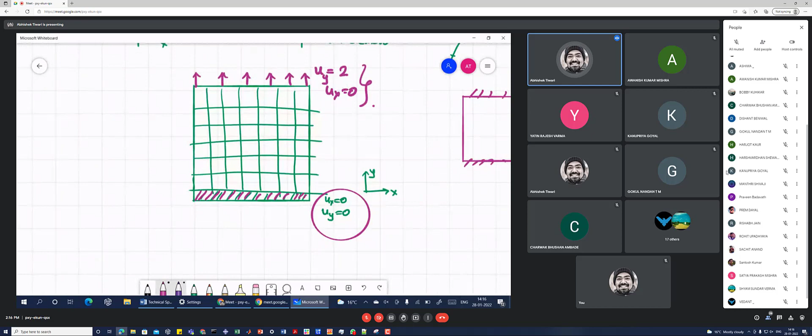And what is the degree of freedom in our continuum mechanics problem? This is called continuum mechanics because the material is in continuum, right? So there is no discontinuity. So we cannot incorporate any hole damage. I mean, hole we can, but we cannot incorporate physical metallurgical things like inclusions and carbides and damage as it is, literally damage like voids, we cannot incorporate. We cannot incorporate dislocations and those kinds of things because those are discontinuities, right?

So we imagine the material to be continuous. It can be heterogeneous, but it is continuous. So there is no discontinuity between material, there is no gap. Is this understood? As long as I define an object, it can be a complicated object, it can be a gear, it can be anything, but wherever the material is, that material is continuous.

So we are in that continuum zone, and what degree of freedom are we solving here? The degree of freedom is the parameter which is being discretized and solved in each element, and in this case that is displacement. So displacement is the degree of freedom. In a two-dimensional problem, on this element you have 4 nodes. The 4 corners are 4 nodes: node number 1, node number 2, node number 3, node number 4.

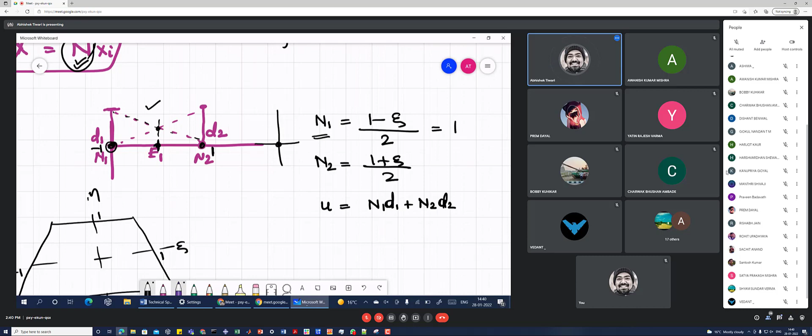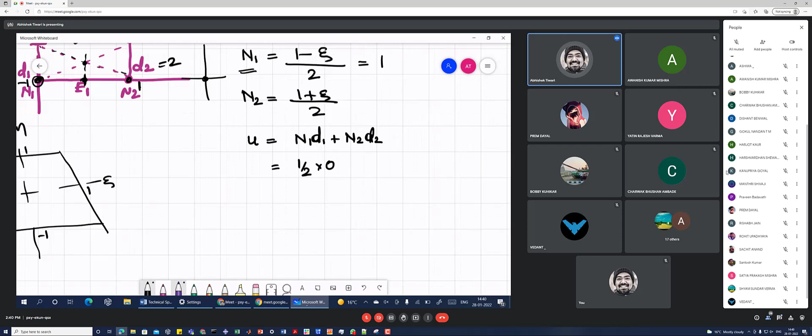Right? And this defines the relationship between the nodal values and the variable of the displacement, the varying, continuous value of displacement. Okay, so if I have to calculate u at the middle point, then u is going to be N1 u1 plus N2 u2, or d1 d2, because u2 you might confuse with uy, so d1 d2, right? So d1 in this case, because it is fixed to the wall, is going to be 0, and d2, let us say, is 2. And node number 1's value at that midpoint is half, so half into d1 is 0, plus half into d2 of 2, so the displacement at the middle point is going to be 1 millimeter.

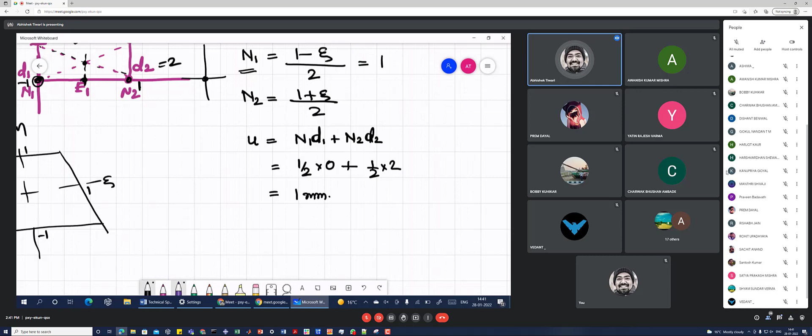Okay, so this is what defines the relationship between the nodal value of displacement and the varying value of displacement. Okay, so if this is clear, then we can proceed with this information, that we can define the displacement with this equation.

Okay, and now from this we have to find out what is the value of strain in each element, and we are doing it for each element. We are not doing it for the whole thing right now. We are dealing with one element at a time.

Okay, so if you remember the strain matrix, we can define that as del u by del x, which is epsilon xx, then del v by del y, which is epsilon yy, and then we have del u by del y plus del v by del x, which is epsilon xy. We have only 3 terms because I am considering a 2-dimensional problem, otherwise I will have a 3 cross 3 matrix. Okay, so this is how I am going to calculate strain analytically.

And in order to do that, you will have to partially derivate this displacement. You see that, right? So let us say if you have to find out epsilon xx, then in order to find out del u by del x, you will have to partially derivate N dot d, right? Yes, sir. Okay, so now you have to do the partial derivation of the shape function, right? And this we have written here in this way.

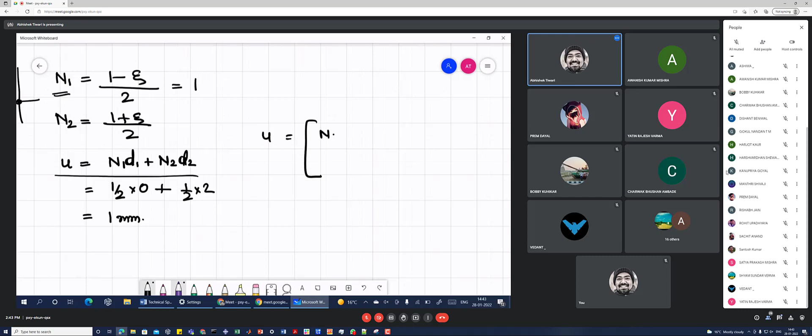In the quadrilateral element, you have 4 values of displacement in x direction and 4 values of displacement in y direction, right? So how will it look? It will look something like this. N1 N1 N2 N2 N3 N3, because you will have 4 points in a quadrilateral. So you will have something like this with zeros, and then you will have a column vector which will be the local value of displacement. So here I will write u1 v1 u2 v2 u3 v3 u4 v4.

And how did you write that first matrix? I didn't understand. Which matrix? This one. So this N, I'm going to tell you how. Because in each quadrilateral you have u1 v1, u2 v2, u3 v3, u4 v4, right? This is okay? Yes, sir. Okay, so that becomes this column vector.

And because we have defined this, this is how you are going to get that formula. So first, what will be the value of multiplication of these two? How many columns? 1 2 3 4 5 6 7 8. So we write rows versus columns: 2 cross 8, 8 cross 1. So the result is going to be 2 cross 1, right? So what will you get? You will actually get ux and uy.

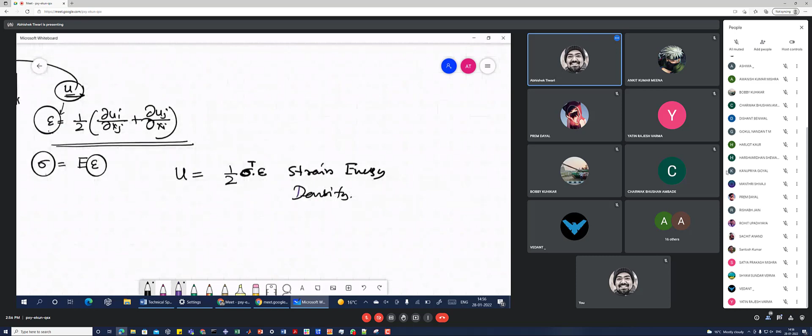So the energy which is being stored or consumed is going to be only because of the deformation, which is strain energy, and because it is per unit volume, you call it strain energy density. Why density? Because it is per unit volume, that's it. Okay, and now you have an energy term, so you make it minimum. Once the energy is minimum, you can say that this is the stage of deformation which is stable, because this is the lowest energy state. Is this making sense? Is it as good as a thermodynamics problem?

Yes, sir. You calculate the energy of the system, but you will not only have strain energy, you will have a lot of energies. Sometimes thermal energy, sometimes some other energy form, and all those energies in totality will have to be minimized. And how will you minimize that? By taking the derivative and putting it equal to 0, right? So that is called the minimum energy criteria, or minimum potential energy criteria. Okay, so this is how the finite element method really solves the problem. If we go into further detail, there are a lot of things to cover.

As I said, at some point we will have to convert from local to global, global to local, back and forth, and here we will have to deal with a lot of things like elasticity, which is isotropic, if not, then anisotropic, or plasticity, creep, viscoelasticity, and damage. All those things will be incorporated here in the material's stiffness. So there we will have to do a lot of things, and then in order to calculate the energy in one element, you have to do the integration of this.

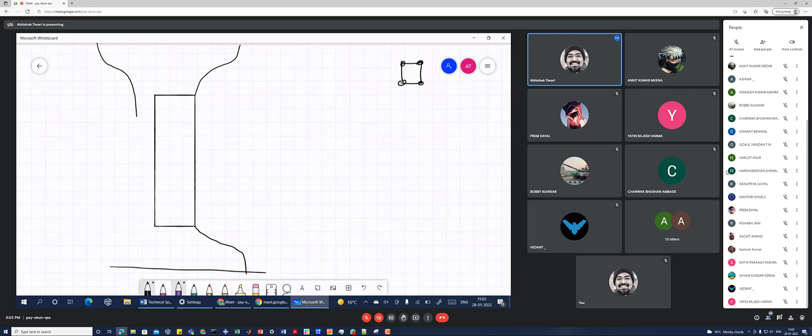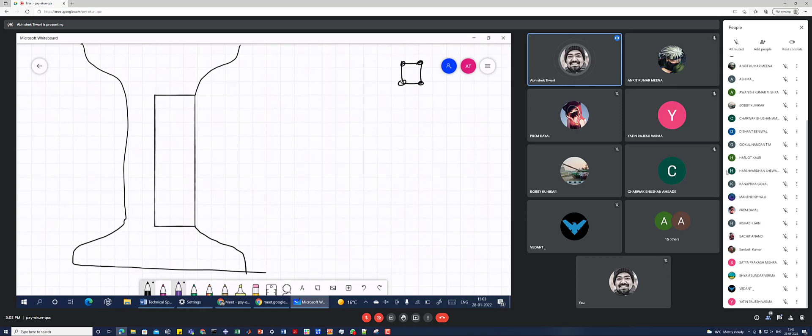Because Yatin was saying the screen was not visible and he was also not here, I am repeating it, but I am not going to do this again and again. So we took this, which is a tensile sample. Now I cannot undo it. Okay, so this is the whole tensile sample, and we are not interested in modeling these areas. We are only interested in modeling the gauge length, which is the parallel length specimen part.

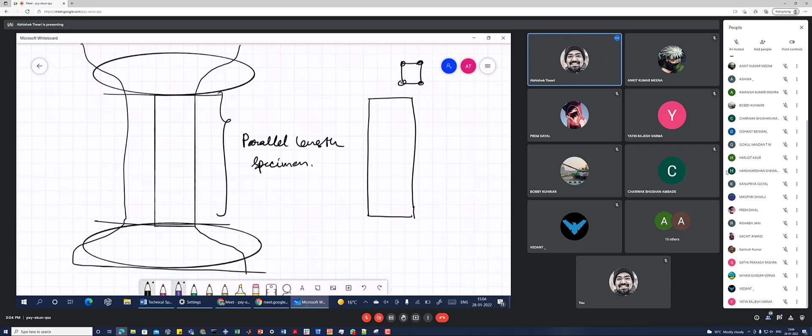So that is what we are modeling, the gauge length part, which is a cylinder, and that cylinder is axisymmetric. So we only take one axisymmetric film out, and then we model that, and now we will come back to the other screen. I am stopping here unless somebody has something to ask.

Okay, so let me stop it here and share it there. Do you see the other screen? Yes, sir. What did it save? Okay, sp2.save. Okay, fine.

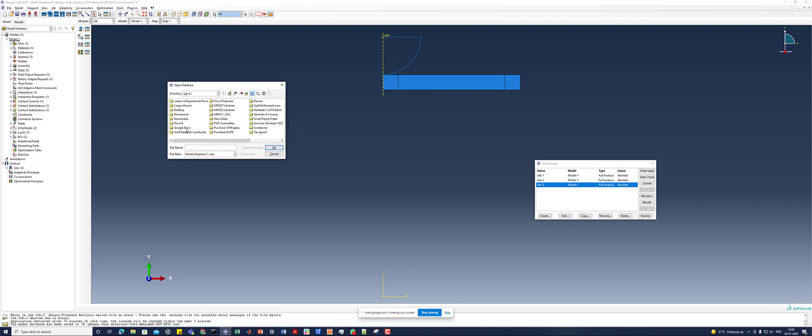So this is the object which we made, and I will make it today again for the sake of revisiting how we did it and what we did, and then we will finish this. For today's work there will be no lab report, so you don't have to submit one next week. But I hope you understand this well and use this time to understand this.

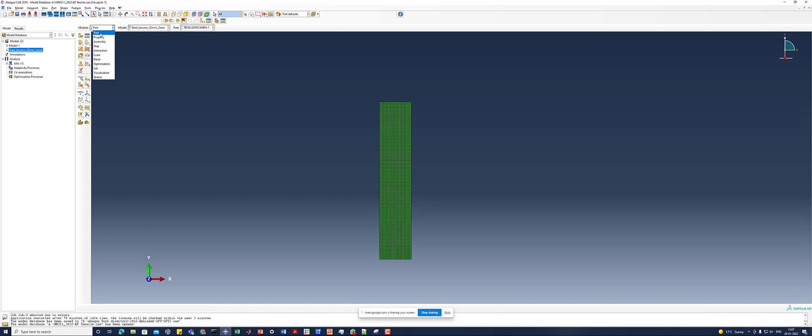Yes, sir. Okay, so I will do again today what we did previously. The plastic part and how we generate the data for yielding, that I will not do. That we have done. You can see the lecture of the previous semester or the previous lecture and get it from there. So let me open this again, and I will tell you a little bit about the software. This, of course, you have to install.

Okay, and I'll have to change the resolution, which is always an issue. So 17, this is very small. So let us try 1920 by 1080. Okay, so this is the software which you install, and then you have a lot of modules here which we will go through one by one, and we will make the model again.

Before that, the first thing, and I am telling you something new today, so those who are here, please be ready to absorb this, and those who are not here, I really feel sorry about that.

Okay, what else? Avnish, can you take a second round of attendance, quick? Yes, sir. Adarsh. Yes, sir. Ankit. Yes, sir. Asima. Yes, sir. Bobby. Present, sir. Charwak. Yes, sir. Gokul. Yes, sir. Arjot. Yes, sir. Aswani. Yes, sir. Kanupriya. Shivaji. Yes, sir. Prem. Yes, sir. Praveen. Rishabh. Yes, sir. Satyaprakash. Present, sir. Shyam Sundar. Yes, sir. Vedant. Yes, sir. Yatin. Present, sir. Sachit Anand. Sachit Anand.

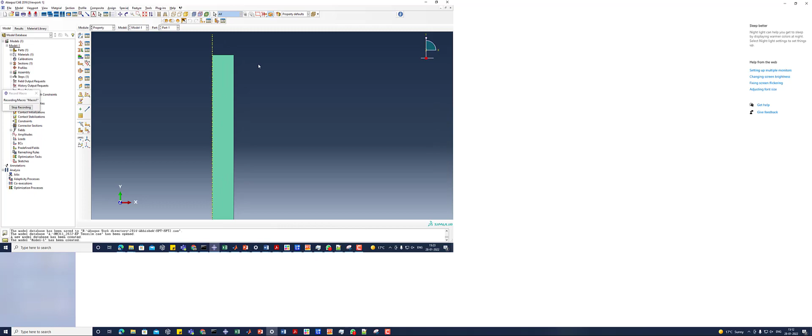Now you go to the third one from the top, click there, section assignment manager, create, you select the object, you see the message here, select the regions to be assigned a section. You select this object, click done, and then it asks which section you want to assign, because you have made only one. So in the pop-up menu you will see only one. So it is already selected, it is solid, homogeneous, the material is steel, and then we click OK. It should have become green. I don't know why it is not green so far. Yeah, now it is green. So some graphics issue. So material has been assigned to this.

Now we go to assembly. Assembly, I told you what it is. So if you are making an engine, or if you are modeling a railway track or a railway wheel, then you have to make the railway wheel, then the shaft, then the rail, and then in the assembly you have to put all those things together, place them correctly and join them, right? So that is what assembly means, assembling different items. We only have one item, so we don't really need to assemble many things, but even then we will have to bring that object to this space of assembly.

By clicking on this one, you do that. And then there are two options, dependent or independent mesh, and that really means simply this: if you make it dependent you will have to mesh it in the part module, if you make it independent you will have to mesh it in the assembly module. That's the only difference. So I will choose independent, you can choose dependent, it really doesn't matter. And we really don't have to do anything in this assembly except bringing the object in.

And now we go to step module. Step module is the place where I tell the model that we are going to deform this material by certain amount, and we are going to deform it using static, so very slow deformation. So there is no time dependency, and we are going to tell that the time period from the beginning of this deformation to the end of deformation is going to be 1. This is a pseudo time, this is not a real time, this is a computational time. You can put it 0 to 10, 0 to 100, whatever value, but again you can normalize it to 0 to 1, so it's better to give it 0 to 1.

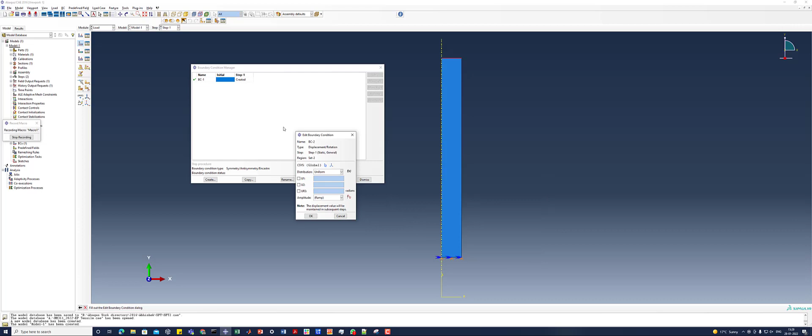So here it is, and if I change the resolution back, yeah, okay. So here I will say that the upper edge does not move in the x direction, that means horizontally, so that is 0. U2 I am going to apply 2 millimeters, and rotation I am not bothered about, so I am not putting any value there, and I say okay.

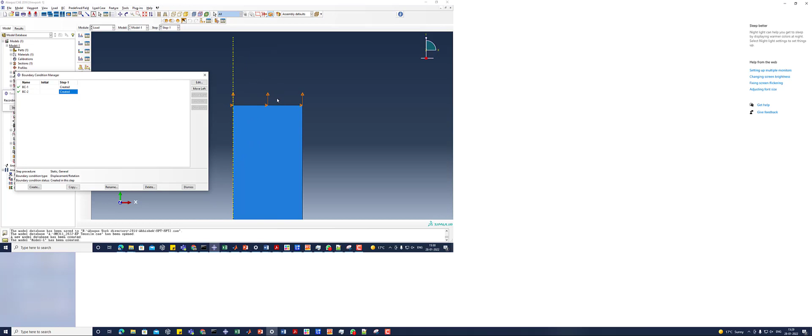So then you see with this arrow the boundary conditions are being shown. Okay, so this is being pulled up and no movement in the horizontal direction, and this one is fixed on the lower side in the y symmetry. Okay, so those are the boundary conditions I have given. Now I go to mesh,

and here I have to define by the fourth tab from the top on the left hand side. You have to tell the model what kind of element you want to choose. We want to choose a linear shape function, so geometric order is linear. We are going to use an implicit algorithm, so we will choose standard and not explicit. The type of element is going to be axisymmetric stress calculation.

Reduced integration, I will tell you what reduced integration is when we deal with numerical integration in the theory class. For now, it is an integration algorithm. I told you in the first part that you have to integrate the stress transpose dot strain into d zeta d eta, right? So that integration is going to be not analytical but numerical integration, and you can reduce some parameters there, and that is why it is called reduced integration, and everything else is done.

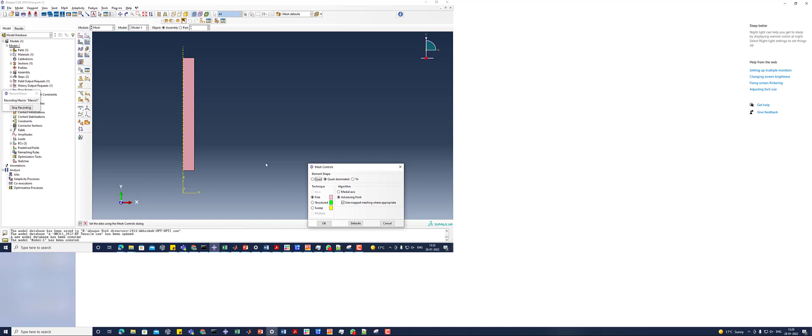So finally you see that this is the type of element which will be solved. The total description of that element is here. This is a 4-noded bilinear axisymmetric quadrilateral. So it's a rectangle which has 4 nodes, and it has reduced integration, hourglass control, and everything else you forget about, and say okay. And now you choose the second button from the right hand side top, and you tell that I only want quadrilateral elements.

I don't want triangular elements mixed with quadrilateral elements, and I want regular meshing everywhere. And then you say okay, and then you have to tell what should be the size of the element. So I will give 0.2 millimeters and apply, and then I click on this one, say yes, and it is meshed. Okay, so you see the elements have been formed. Now meshing is done.

I go to job, and then I create, and I call it elastic axisymmetric steel sample with 0.2 millimeter of element size and 2 millimeter of displacement applied. That is the name I have given. I say okay, and then I submit the job. The job is submitted, and then I go to monitor, and here you will see the messages that the analysis of input file has started, the analysis of input file has completed, then the calculation has started, and you see the calculation happening here, and then the calculation has finished.

So the analysis has been done, and now you click on results, and you see that the sample has been extended by a certain amount. If I play the video, you can see how the extension is happening. The stresses are not changing locally drastically because it is an elastic problem. So there is no plasticity, there is no damage, nothing. So it is just going to extend like rubber.

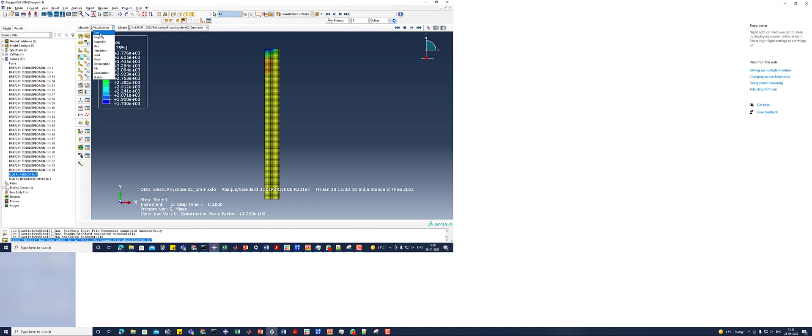First, we created a geometry. It creates a sheet size where you could sketch everything, then it defines the sketch points, and we had a construction line which is the axis of the axisymmetric space. Then we drew, so we somehow have told Abaqus to put it in terms of coordinates, looks like. The rectangle we made initially in the sketch was sketched by joining 2 points, and those 2 points are these.

Then we assigned a dimension and changed it, first to 5, and then I said the radius has to be 2.5, so that is here. So I will make it 1. Okay, I have changed it to 1. For instance, you have tested n number of specimens and want to model them, and the dimensions are a little different. You don't have to model the whole thing on the user interface. You can change a few things here and there and run this code, and everything will be done for you.

I make it 1 millimeter in the radius and 50 millimeter in the gauge length, so like a wire. Here I change it to 50. All these lines are just the recording of the views and going from one module to another. Then at a certain point we defined the material, so that information will also be there. In the material we have given Young's modulus, here: 200 and 0.3 is the Poisson's ratio. Here we are defining the material, named steel.

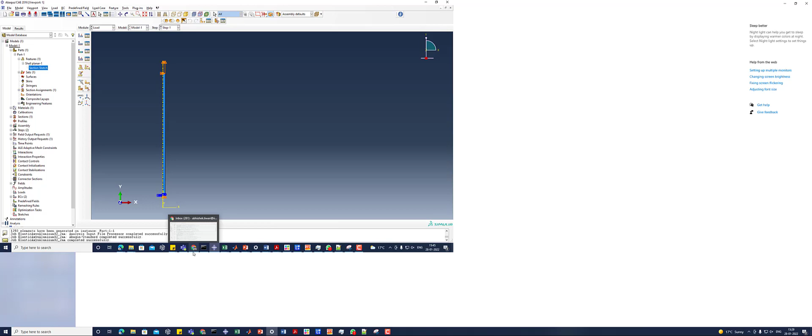Sir, what about data? Which data? Sir, the data you were supposed to send us for that elastic plastic lab report. Yeah, but you have to remind me what the data was. Sir, it was an Excel file, right? You basically reduced it to 74 values, I guess. Oh, that data. Yes, sir. Load displacement values. From that you have to find out the flow stress and plastic strain, yes, sir.

Okay, so let me see where it is. Elastic plastic. This looks like it. Elastic plastic is already open. When did I open it? Anyways, do you want to reopen? No. Okay, so you want load and displacement. Force and displacement I'll give you, because that is already small data, no?